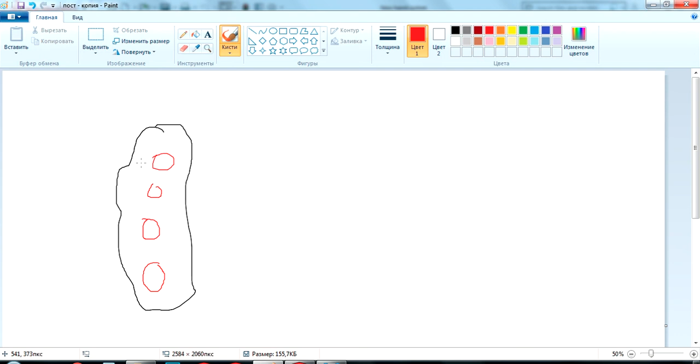For example, we have a plate. You maybe remember, previously for 1.2 plates we added holes for the laser cutting process, holes like we will have in the final design of the plate. So actually we made this for 1.2 plates. We already did this.

Tomorrow or today I will make the same for 0.8 plates. It's just for your information.

Let's move next. Maybe you remember, Manuel, you said that catalog numbers that remain after we finished, the remaining plates that we didn't use for KLS Martin design, we need also to adapt to KLS Martin design.

So please look, this is the remaining catalog numbers, remaining plates for 0.8 plates, and you see I marked this - I already adapted this design to KLS Martin design. So you see we have only this remaining catalog number for 0.8 plate.

I do not see that we need to use this plate also in the new design, because we already have this plate. So actually disregard 0.8 plates. Please check this file - maybe I am talking too fast, but I would like to save some time.

Okay. No, why is it not working? Okay, it's working. Not this.

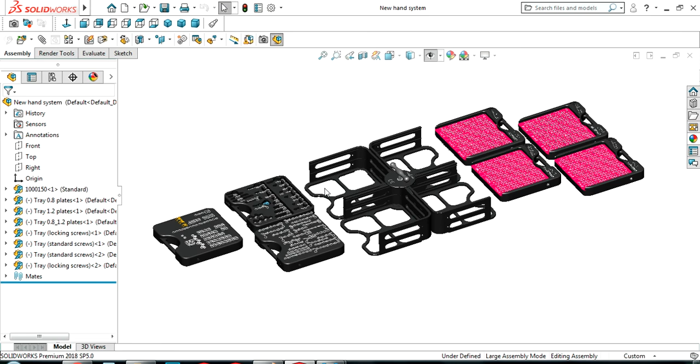You see this, I already put our new hand plates into the kit. It's very raw, a very conceptual design.

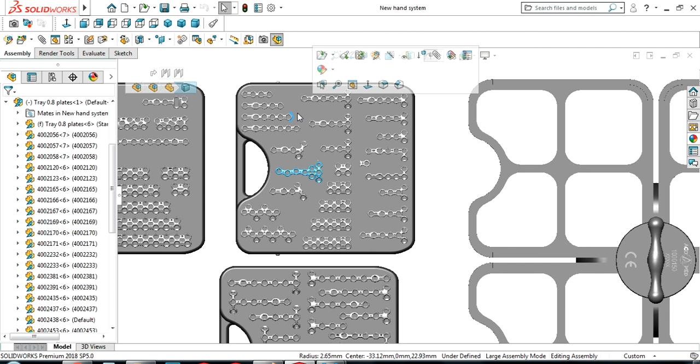You see this is the tray with 0.8 plates. This is the tray, sorry, maybe slow PC - this is the tray for 1.2 plates. And we still have plates, these hooks.

And you see we need also a third tray where we have 0.8 plates and where we have 1.2 plates.

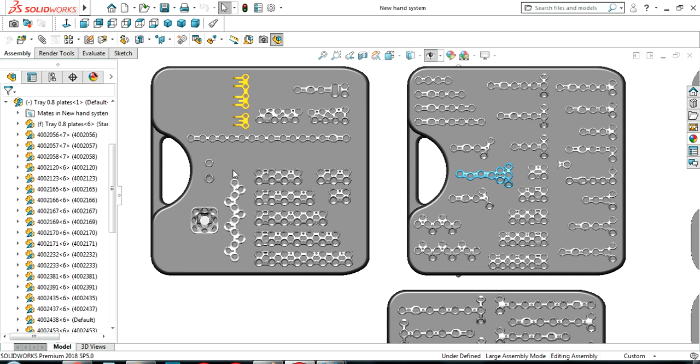And let's go to screws. You see, Manuel, here I think it's not a problem, but we have a lot of screws. We have 3 different diameters of standard screws, and 3 different diameters of locking screws. And length of screws, we have a lot, from 5 millimeters to 30 millimeters.

And I see that we need to use 4 trays. In one tray we put all screws together. I will open the sketch.

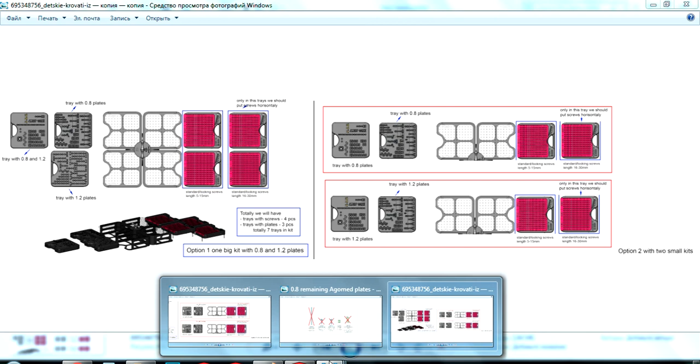Actually, I see 2 directions. Please, can you check this sketch together with me? Maybe you will have some remarks from your side. Also, we can discuss it tomorrow.

So you see, I see option 1 where we have a big tray - not a tray, a big kit. We can put one tray with 0.8, one tray with 1.2 plates in one combined tray, let's call it combined tray, where we have remaining 1.2 and 0.8 plates. And we have, you see, we can use 2 trays with standard and locking screws.

In these trays we can put 1.5, 2.0 and 2.3 screws, and we can use one tray for length 5 to 15 millimeters, and two trays with screw lengths from 16 to 30 millimeters. So totally we will have trays with screws, quantity 4, and trays with plates, quantity 3.

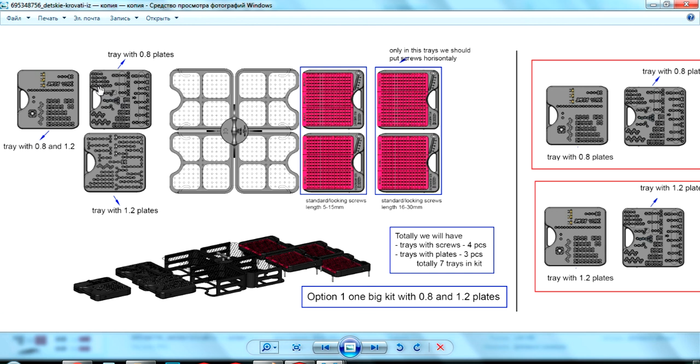From one side we have a benefit - we have a big tray with all plates and screws in one tray. But from another side, maybe not a disadvantage, but there are a lot of elements inside, so the doctor will need to search for plates. For example, he needs one plate, he may need a lot of time to search and find the correct screw and correct plate.

So based on this, I see another option. Manuel, please can you check it from your side? Maybe we can use another option - for example, we can use smaller kits, 2 smaller kits.

So for example, one kit for 0.8 plates and one kit for 1.2 plates. We have no enough place in one tray for all the 0.8 plates, so we'll need 2 trays. What I suggest, we can use one tray with these screws - 1.5, 2.0, 2.3 standard, and same for locking - and the same for another tray.

And what remarkable features or elements are in this design? The tray with screws from 16 to 30 millimeters - we will need to put screws here horizontally. Now I put it here vertically, but we have no place to put all the trays here in the kit. So just for your information, we will need to put long screws horizontally. These screws can be vertical, these screws need to be horizontal, and this is also true for this big tray.

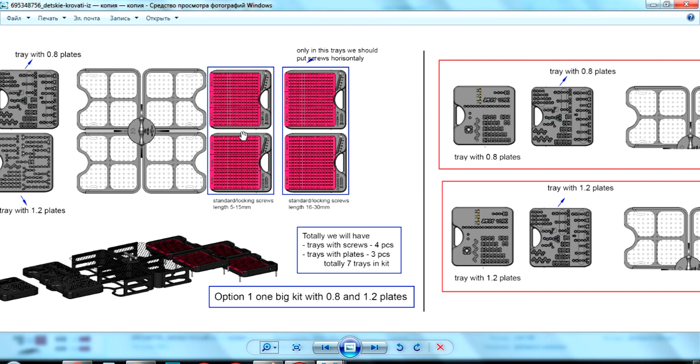Okay, also my note, just a remark from my side - for small trays, if we choose option 2, I think this also has some benefits. With this option, we have more smaller trays where a doctor can find the necessary screw more quickly, and where a doctor can find the correct plates and screws that he needs more quickly.

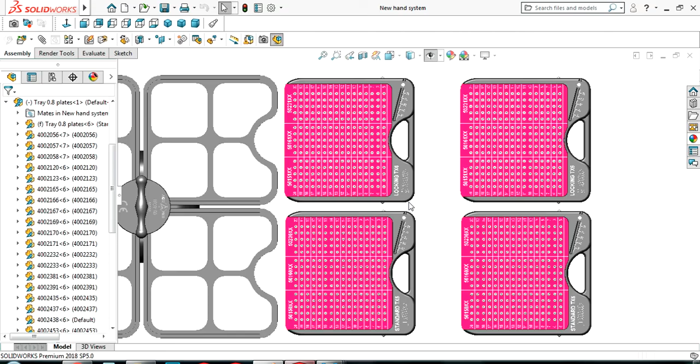And I will draw something. You see, usually we are using 5 screws in a tray with screws. I will do it like this, I will make this like this. So usually we are using 5 screws for each length. So for example, length 5, and we have 5 screws.

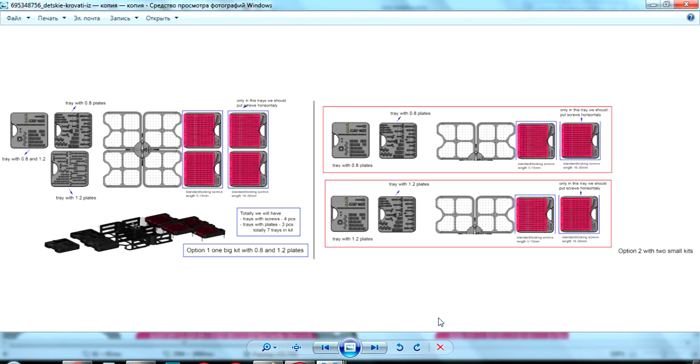In small kits, it's only related to these small kits. What I suggest - we will not be able to put all the screws in this one small kit. What I suggest, maybe we can try to use not 3 but... oh sorry, we can use like this, maybe 3 screws.

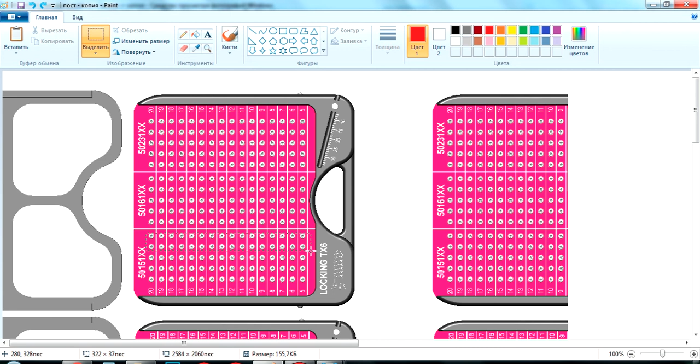Yes, I will draw, I think you will understand what I mean. You see, for example, 3, and we can put screws tightly to each other, like this, and we will have - you see, this is the tray with locking screw - and we will have additional place, sorry, okay like this. So what I mean, we will have additional free area for placing standard screws here. So please, can you check it from your side?

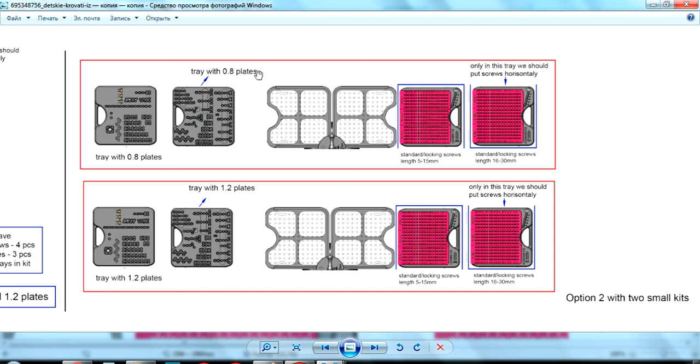This, I think, can be a good option to win some free space in the tray. And like this we can organize two small kits with 0.8 and 1.2 plates. So Manuel, please can you check this video?

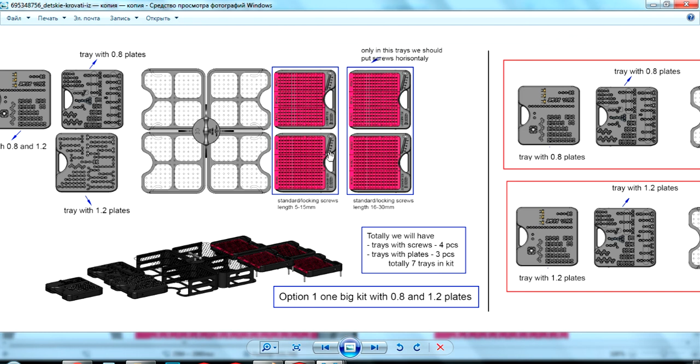I think you understood what I meant - I see 2 options of kits that we can create. Maybe you would like to create both options. Yes, I think this is a good option. Also, we can create one big kit where we have all plates and all screws inside, and we can create 2 small kits - this one big kit and these 2 small kits where we will have 0.8 and 1.2 plates.

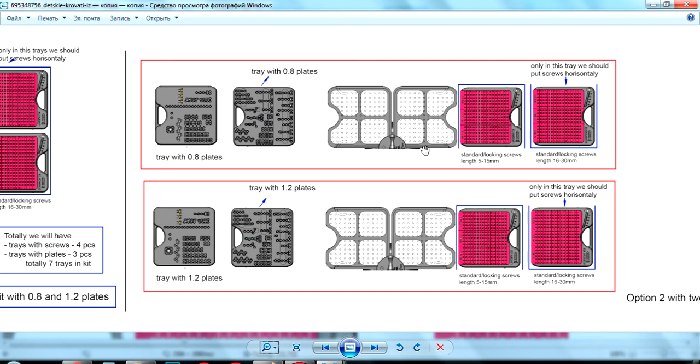Actually, this is all that I would like to say in this video. Thank you.